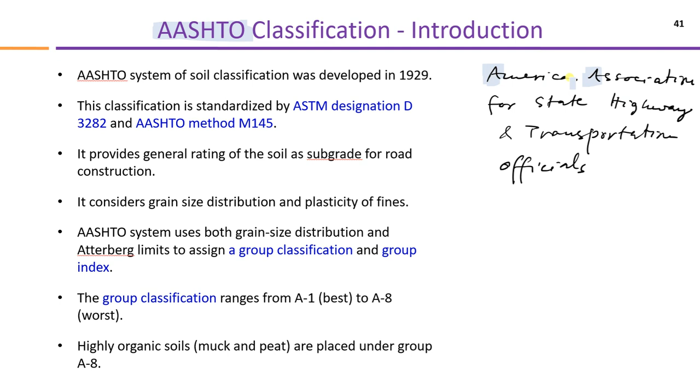So this is the abbreviation. The first A, American Association for State Highway and Transportation Officials, AASHTO - this is called AASHTO. This classification is primarily for highways.

This classification is done for soil to be considered as a construction material in pavements in highways. This classification was developed in 1929, and it is standardized by ASTM. The ASTM designation is D3282, and there is also an AASHTO method for this, which is AASHTO method M145.

So this normally gives us a rating for the soil to be used in road construction. In AASHTO, we divide the soil into 8 groups. It starts with A1, A2, A3, A4, and goes up to A8.

The first 3 groups, A1, A2, A3 - these are the granular soils. These are going to be the gravels and sands, or simply I can call it granular soil.

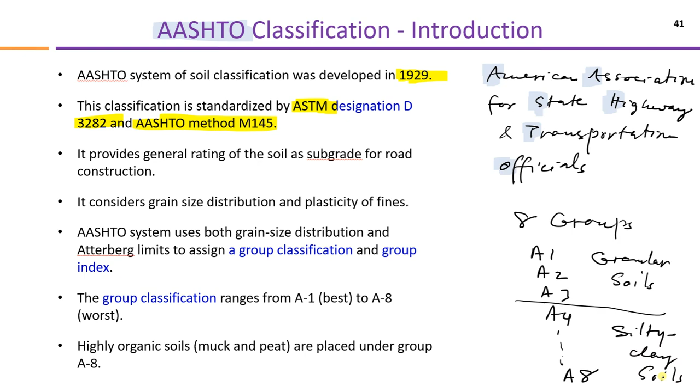So the division among these two groups is passing number 200 sieve, which is 35%. It says that if passing 200 is less than or equal to 35%, this soil will be termed as granular soil.

Granular soil. So what does it mean? Granular soil means this is gravel and sand. And if passing number 200 is more than 35%, then it is silt and clay.

Silt, clay material. So what is silt and clay? Silt is M and clay is C. Gravel is G and sand is S. If you remember, in the unified soil classification system, the division was at 50%, but here in AASHTO this is a little bit different.

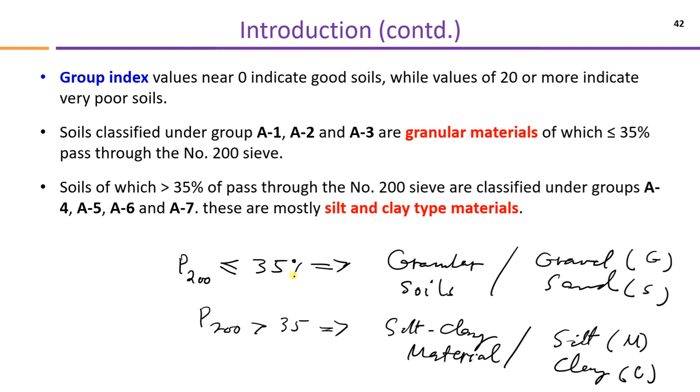So let's look at the similarities and differences between these two methods. Let's first start - on one side I'm going to write unified soil classification, USCS, and on the other I'm going to write the AASHTO classification.

So we have two groups. In case of unified classification, if you remember, passing number 200, if it is less than or equal to 50%, this is called coarse grained soil. And if you remember coarse grained soil, there were some symbols.

It is actually gravel and sand, but if the gravels are well graded or poorly graded, then it is classified accordingly. It could be well graded gravel or poorly graded gravel, or it could have gravels with clay or gravels with silt. Okay, let's move this line maybe here.

Let me correct it here, let me rewrite it. So it could be well graded gravels or poorly graded gravels, or gravels with clay and gravels with silt. And similarly, well graded sands, poorly graded sands, or sands with some clay or silt - silty sands.

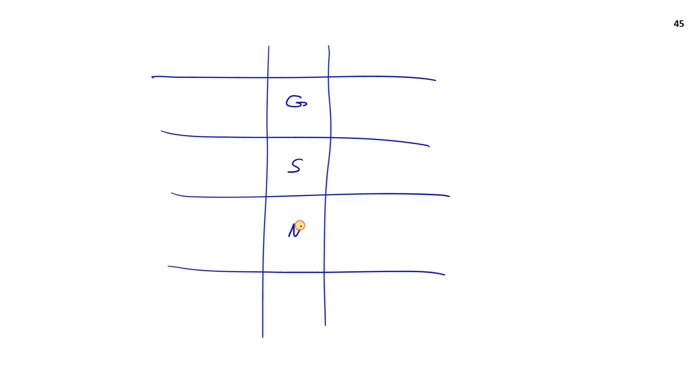On one side I'm going to write AASHTO, and on the other side I will write the unified classification system: gravel, sand, silt and clay. So here I'm going to write AASHTO, and here on the right hand side I will write unified soil classification system. Let's first look at unified classification system.

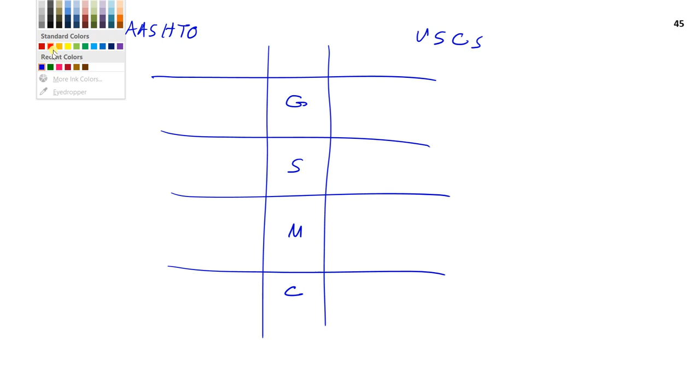In case of unified classification system, gravel's upper limit is 3-inch sieve, which is 75 millimeter, and the bottom is number 4 sieve. Number 4 sieve is 4.75 millimeter, and the division between sand and fines is number 200 sieve, which is 0.075 millimeter. Now, in case of unified soil classification system, how do we divide silt and clay?

We do not do the hydrometer analysis or sieve analysis. We are going to see if it falls on, above, or below A-line on the P chart. So if it is silt, we say it plots below A-line on the P chart. And what is a P chart?

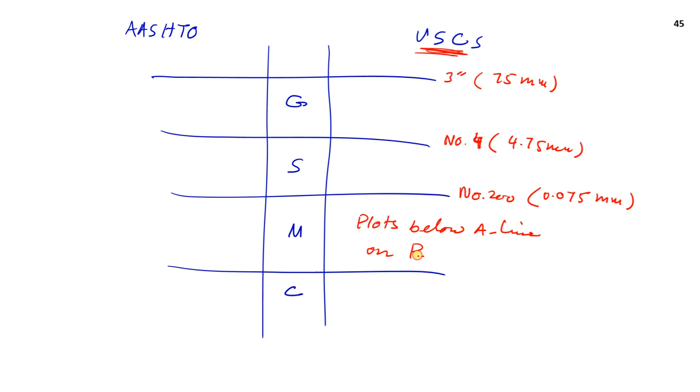This is the plasticity chart. And what is clay? It plots on or above. Even if it is on the line, it will be called clay. On or above A-line on the P chart. So if you remember, this is the P chart.

Here is some dual area for dual classification, and if this material falls above this line, it will be called clay, and if it is below this line, it will be called silt. Horizontal axis is liquid limit, vertical axis is plasticity index. This is called the P chart, plasticity chart.

This is what you have studied in the previous lecture in unified soil classification system. Now let's look at what happens with AASHTO. For AASHTO, this upper limit is the same, 3 inch or 75 millimeter.

Now the major difference is here. This is not number 4 sieve, but this is going to be number 10 sieve. Number 10 sieve is 2 millimeter, so up to 2 millimeter it is considered gravel. This is the big difference between unified and AASHTO.

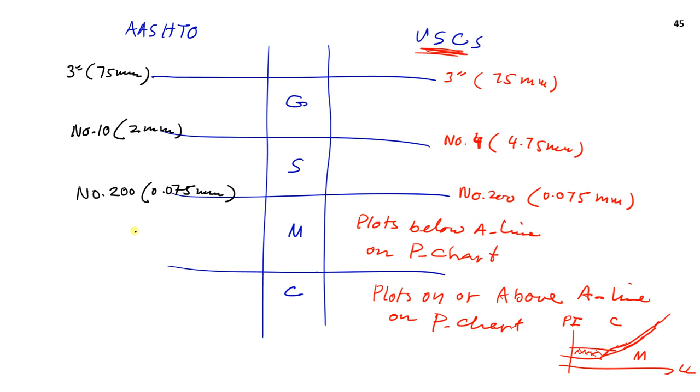For the division between sand and fines, this is the same, number 200 or 0.075 millimeter. But how do we differentiate between silt and clay? For that, we are only going to look at the plasticity index. In AASHTO, we only care about the plasticity index.

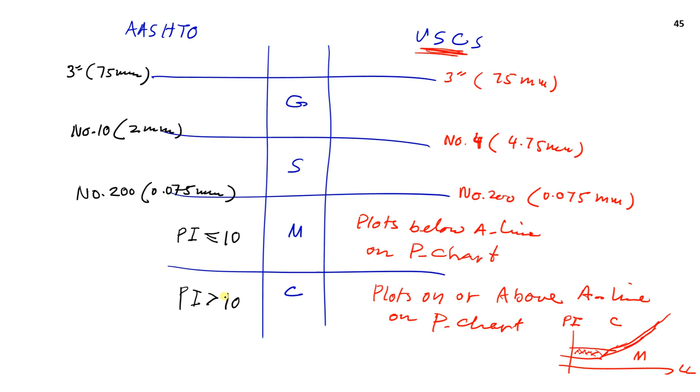If plasticity index is less than or equal to 10, it will be considered silt, and if plasticity index is more than 10, it will be considered clay. So this is the major difference between these two classification systems, and I have explained how the particle sizes are defined on this page, so you can go through your notes to understand the particle sizes.

Gravels, in case of AASHTO, pass the 3-inch sieve and are retained on number 10 or 2 millimeter, and sand passes the number 10 or 2 millimeter sieve and is retained on number 200 or 0.075 millimeter. The same thing we have seen earlier. And for plasticity, if the plasticity index is 10 or less, it is termed silt, and if it is more than 10, it is termed clay.

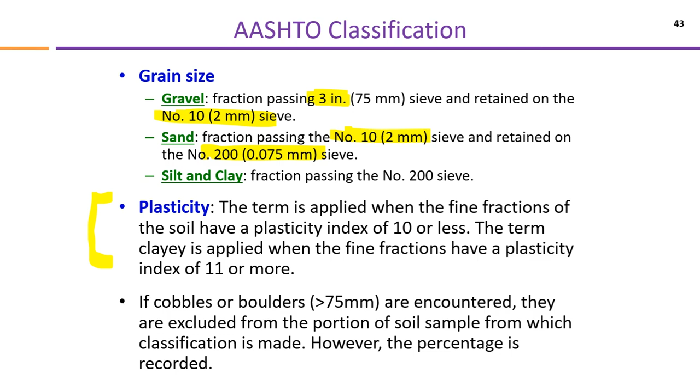So how are we going to classify? This classification process is easier than the unified classification system. Here we have two charts. One is for granular materials, where the passing from number 200 sieve is less than or equal to 35. So we follow this chart, starting from the left case, and if all conditions are satisfied, this is our soil; if one condition is not satisfied, we move right, continuing until all requirements are satisfied.

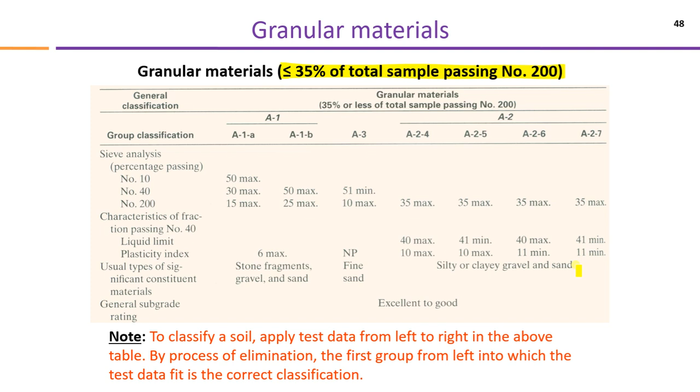When all the requirements are satisfied, we stop and say this is our group. This is for silt-clay materials. For silt-clay materials, the passing is more than 35%. We will see how to use this table when we do examples.

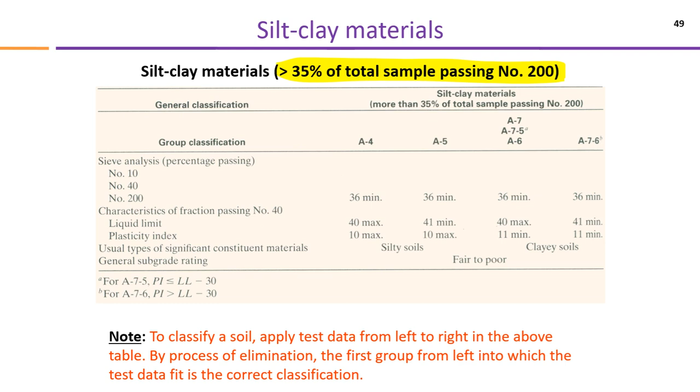One more thing here is the group index. Group index is calculated using this formula, which is the formula for calculating group index. Here it's written F200, so you can consider this is actually F200, P200 is the same. This is P200, and this is also P200. So this is an empirical equation or empirical formula. This tells us about the quality of material. Remember, the granular materials A1, A2 and A3 always have a group index equal to 0.

In case of granular materials, the group index will always be equal to 0. In case of silt-clay material, the group index might be 0, but it might also be more than 0 — it might be a non-zero number.

When you calculate the GI value, if it comes out negative, for example minus 2 or minus 2.3, what do we do? We make it 0. All negative values will result in 0.

And if we have a number with decimal places, we round off to the nearest integer. For example, if it is 3.4, 3.3, 3.45, or 3.48, it will become 3. But if GI is 3.5, 3.6, or 3.7, it will round off to 4. So you get an integer.

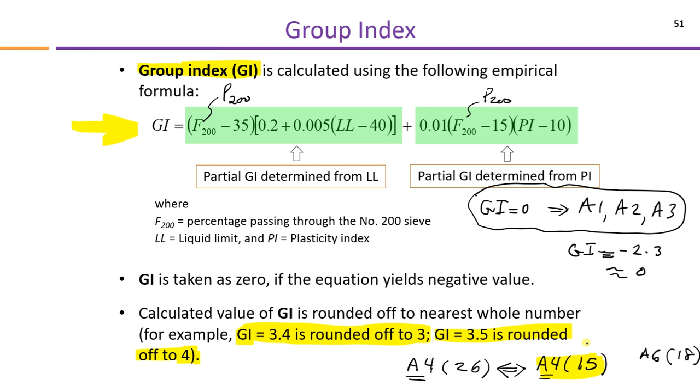One more thing: when dealing with two categories of soils, A26 and A27, only in these two cases do we use the second part of the group index formula — the second half, or second part, of the equation.

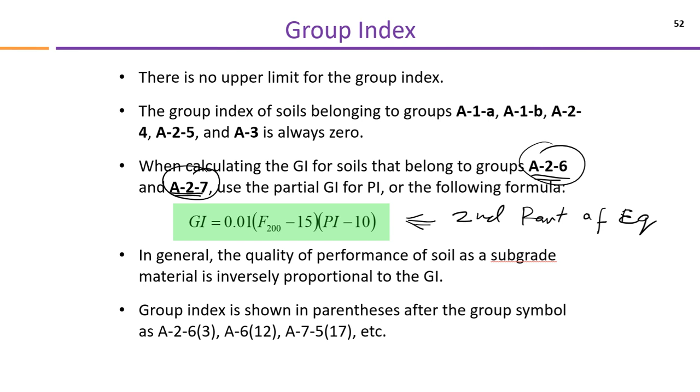So this was all about the background theory. Now let's do some examples, then you will understand how to use these tables. Let's start with our examples.

Let's do some examples here. This is the first example, which we also did previously in the unified classification system — we are going to do the classification of soil A.

Remember, in AASHTO we have to look at what is passing number 200 sieve — is it greater than 35% or less than 35%? So we have to look at where the curve is on the S-shaped curve, and from there draw a horizontal line.

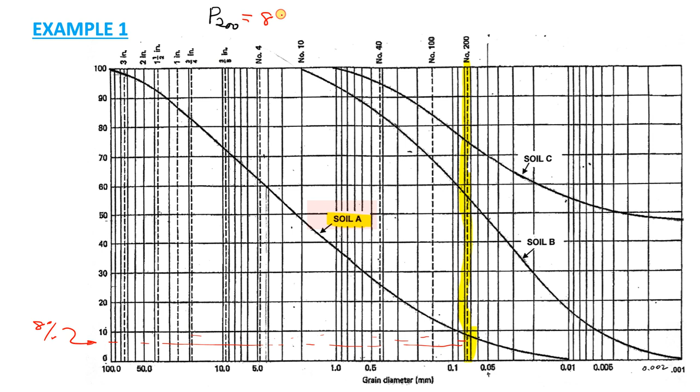So passing number 200 is 8%, which is definitely less than 35%. So it means it is a granular soil, and it will have group A1, A2, or A3. So let's go straight to the table for granular materials where passing number 200 is less than 35.

If you look at it, we need 3-4 things: passing from number 10 sieve, passing from number 40 sieve, passing from number 200 sieve, and we might need liquid limit and plasticity index. In our previous class, using USCS, we used a liquid limit of 42 and a plasticity index of 11 — this is what we'll use in this example.

So we need to find passing number 10 sieve. Where is number 10 sieve? This is number 10 sieve, and remember, number 10 sieve has an opening of 2 millimeters — this is the division of sand and gravel in AASHTO.

Next is number 40 sieve, which is 0.425 millimeters, and the last one is number 200, which we know is 0.075 millimeters. Remember these three sieves and their openings — this is very important.

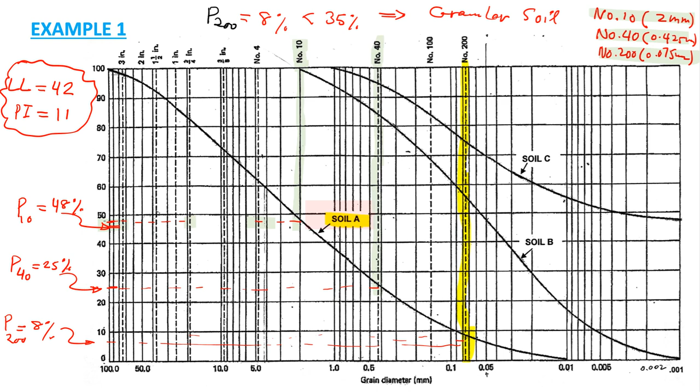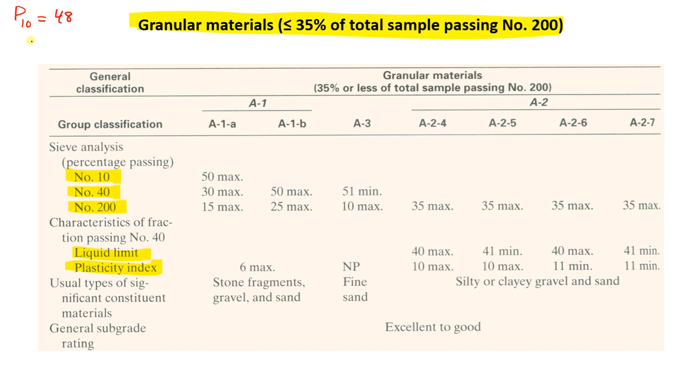Let me write here: P10 is 48%, P40 is 25, P200 is 8, liquid limit is 42, and plasticity index is 11.

So we have to start from the left column and check if all the requirements are satisfied. It says P10 is 50 maximum, meaning it cannot be more than 50. Our value for P10 is 48, which is less than 50, so it's okay.

Next, P40, passing number 40 sieve, is 30 maximum. Our value is 25, so it's okay. The next one is P200, which is 15 maximum. Our value is 8.

So this is okay. Now, plasticity index can be 6 maximum, but in this example we are dealing with a plasticity index of 11, so this condition is not satisfied.

So we go to the next column, A1B. Remember, A1B has the same condition for plasticity index, so that condition is also not conforming with A1B. So we move to the next.

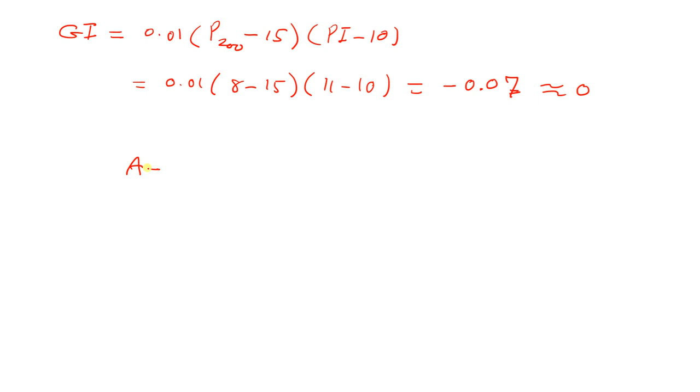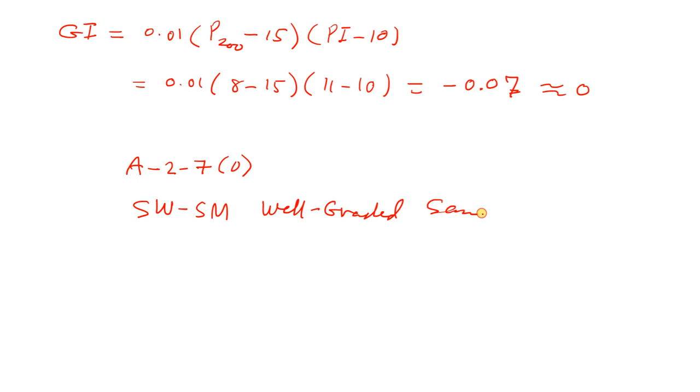And if you recall the previous lecture, we classified the same soil using the unified system, where it was SW-SM, well graded sand with silt and gravel. So in unified classification it is SW-SM, but in AASHTO, the same soil is A2-7 with group index 0.

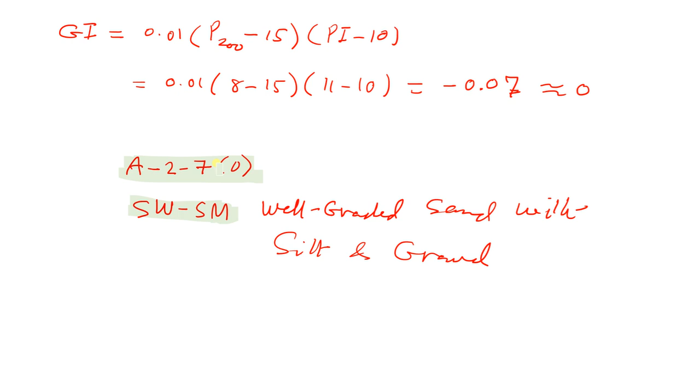Next is example number 2, where we'll do the classification for soil B only. If you go back to the previous lecture, this was example 4 in the unified classification lecture - I think it was classified as sand. Now we have to look first, whenever doing AASHTO classification, the first step is to look at what is the passing number 200.

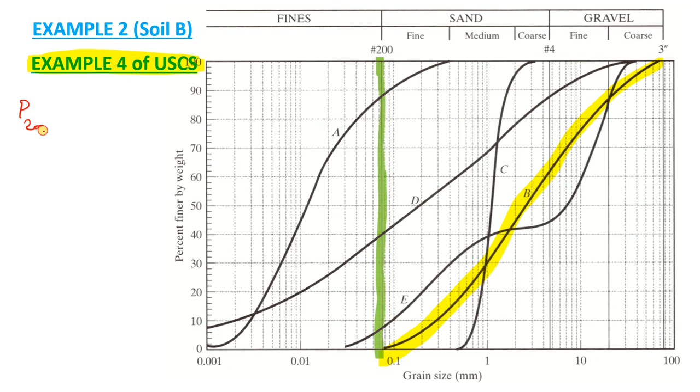So here is number 200. If I go down, you see it is 0. So passing number 200 is equal to 0, which is less than 35, so this is a granular soil.

And remember, passing number 200 is 0, which is less than 5%. When it's less than 5%, we cannot do the liquid limit or plastic limit test, so it's a non-plastic soil - an NP soil with no liquid limit or plastic limit values. So what we need here is to look at this granular material table; let me copy that table.

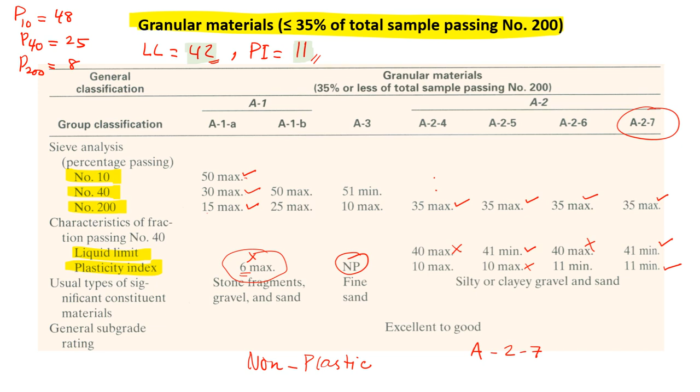Let's clear all that here. So what we need is passing number 10, number 40, and number 200. Let's go back and find out P10, P40, and P200. P200 is 0.

Now what is P10? Number 10 sieve is 2 millimeter. So where is 2 millimeter? Let me first find where is 2 millimeter. This is 1, this is 2. So this line is actually number 10 sieve.

We also need number 40. It's not written here, so number 40 sieve is 0.425. Now where is 0.4? This is 0.1, 0.2, 0.3, 0.4. This is 0.5, so it's in between. So this line, I will take 0.4 because there's not much difference between 0.4 and 0.425, 2, 3, 4. So this is 0.1, 2, 3, 4. That is number 40.

Number 40. So let's start with number 10. We are going to draw the line, and when we reach this S-shaped curve, from there we are going to draw a horizontal line. So this value comes as, let's say, 42, 42, 43. Let me take it 42.

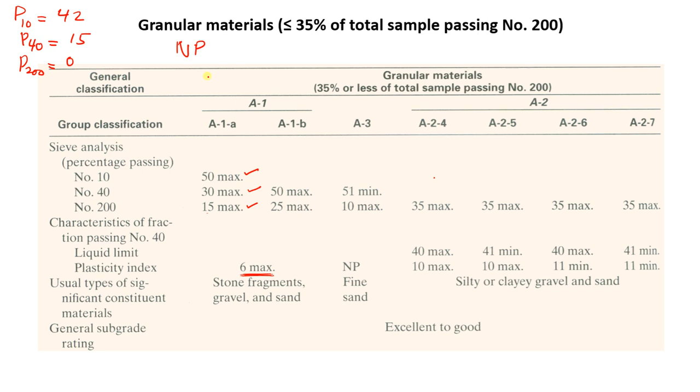And here you see it says plasticity index can go up to maximum 6, so it could be non-plastic up to maximum 6. In our case we have no value. So we are going to select this soil. This is going to be our soil A1A, and you are going to calculate the group index, and when you calculate group index you will see that it is going to be 0.

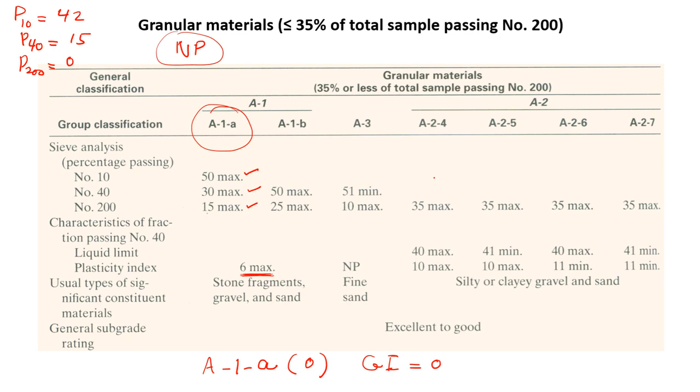You should try. So this soil B is A1A with group index 0. A1A. Okay, and when we did this classification in the unified classification system, it was SW - well graded sand with gravel. Check your notes of the previous lecture.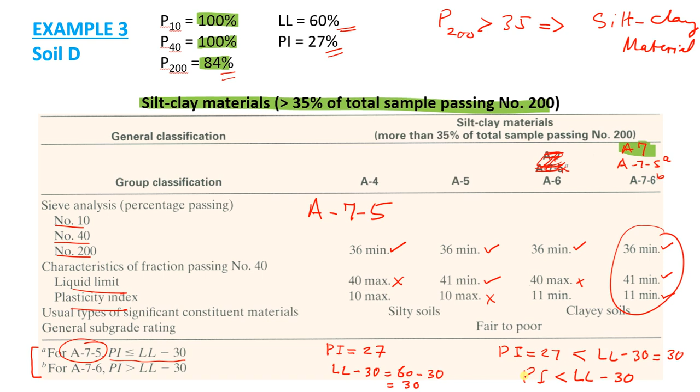So when plasticity index is less than liquid limit minus 30, the group is going to be A7-5. So you see all the conditions are satisfied, but our soil is going to be A7-5 because of this condition. So the soil is A7-5. Now we have to calculate the group index.

If you remember the formula for group index, it is P200 minus 35, times 0.2 plus 0.005 times liquid limit minus 40, plus 0.01 times passing 200 minus 15, times plasticity index minus 10.

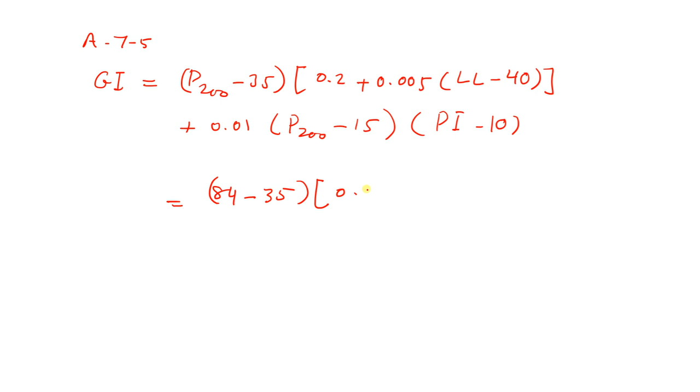So just put the values. Passing 200 is 84 minus 35. This is times 0.2 plus 0.005 times liquid limit, which is 60, so 60 minus 40, plus 0.01 times 84 minus 15, and plasticity index was 27 minus 10. Okay, simplify this.

It will come as 26.43. Now we are going to round off to a whole number. Because it is less than 0.5, it is going to be 26. So what is this classification? It is A7-5 with group index 26. So this is the classification.

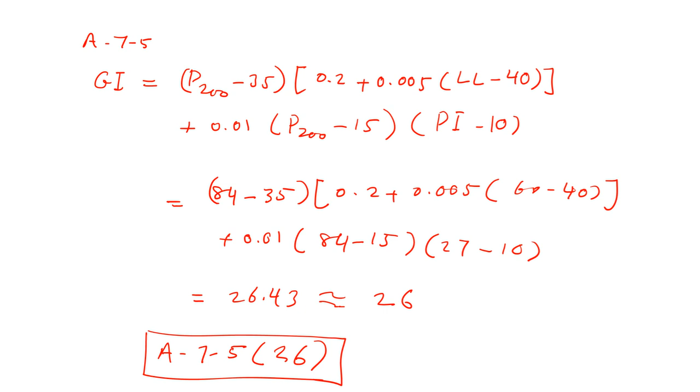So what you can do is try yourself all other cases. Let me just check it here. So this is A7-5 with group index 26.

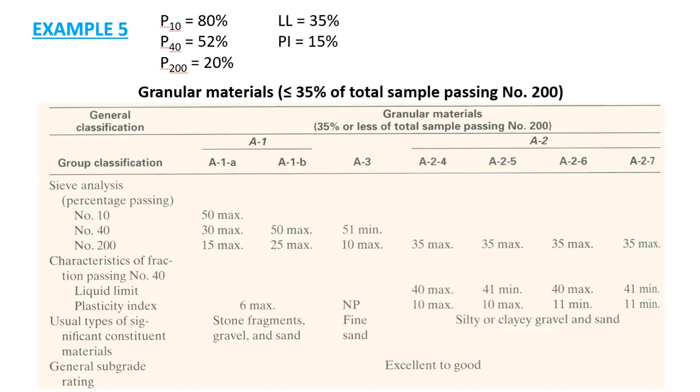Let us now do the next case, which is soil number 2 - I will call this example number 4. Remember the values: 100, 100, 70, 40 and 10. So this is the same data that we got from the table, soil E, which I call example number 4.

Here we see that passing number 200 is more than 35, so it's a silt-clay material. So we are going to use this table. Let us start: for number 200, if passing is 36 minimum means 36 and above. It's okay because in the example it is 70.

Next is plasticity index - wait, liquid limit 40 maximum, our value is 40, and PI is 10 maximum, and our value is 10. So all the conditions are satisfying in this very first case. So the soil is A4.

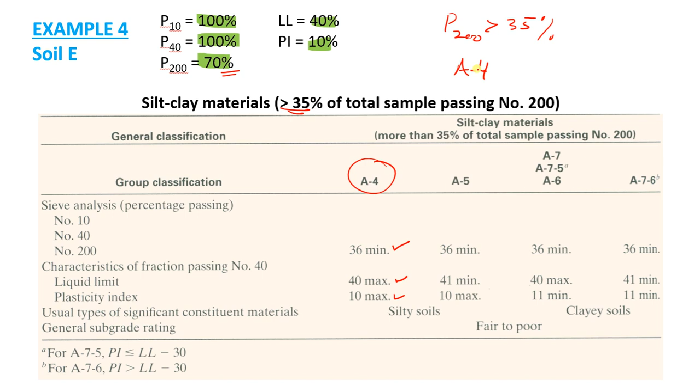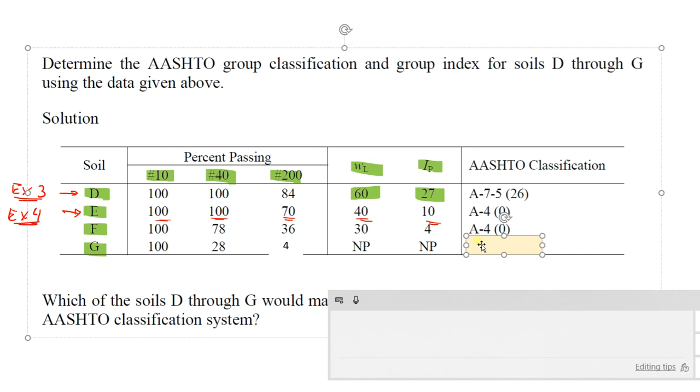Now you have to calculate the group index yourself. I'll just go back and see what this soil is - it is A4, and when you calculate, the group index is going to be 0. You should also try soil F - this is also A4 with group index 0. And you should try soil G - this is A3 with group index 0.

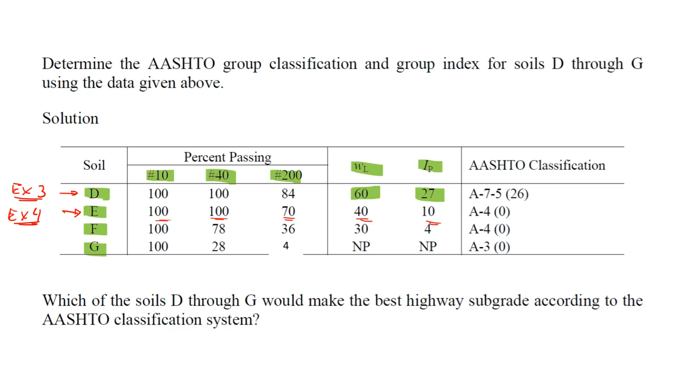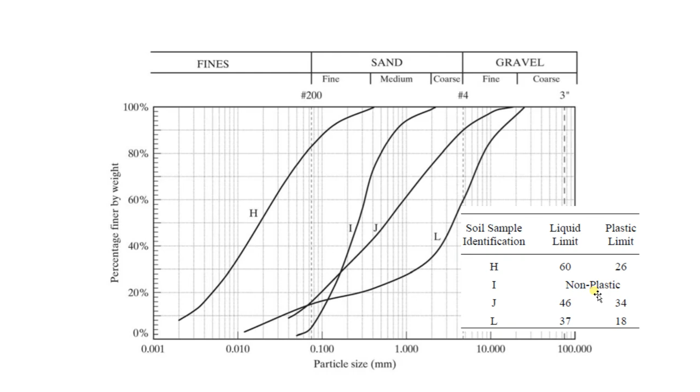Try it yourself. Now there are some other examples also. So here is a page - please do this as practice. There are 4 soils. You can read the passing number 10, 40, 200 from this graph, and the liquid limit and plastic limit values are given.

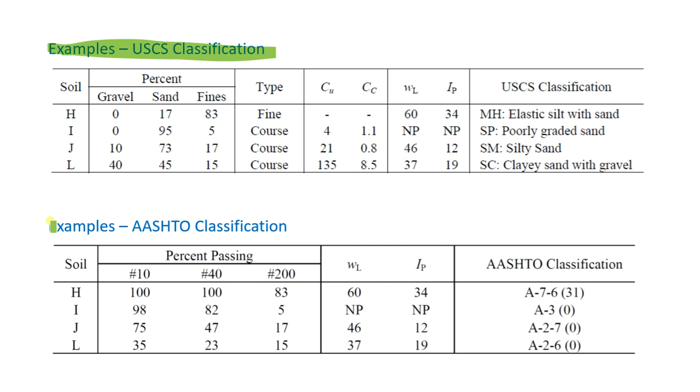For some more practice, there are some more questions. So here I have both unified classification and AASHTO, and the classification is already given - please check if your answers are matching or not. This will give you a very good chance to practice. So with this we come to the end of this chapter, having discussed both unified classification and AASHTO classification.